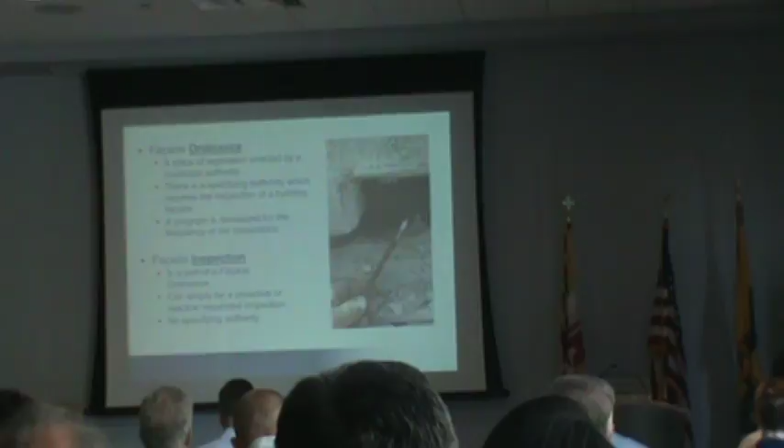The first presentation is going to be about facade inspections. What's important is that before you talk about facade inspections, we hear other terms floating around, especially up in the Northeast. Facade inspection is one thing, facade ordinance is another thing. They're partial, one is part of the other, but we're going to talk specifically about facade inspections because there's something missing in most of the cities here in Maryland, Virginia, and DC.

Facade ordinance is a piece of legislation, that's the best way to look at it. It's enacted by a municipal authority. There's a specifying authority that really dictates what needs to be done. So the ordinance is a piece of legislation, there's a specifying authority, and there's some program that tells you what they want, from the frequency of inspection.

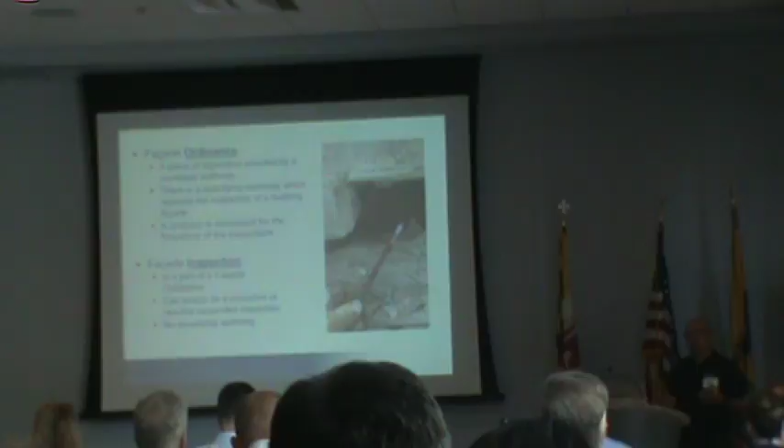Every 5 years, every 2 years, all kinds of different things. We're going to talk a little bit about ordinances just so you're exposed to them, but know that it doesn't matter if you're from down here because there are no ordinances anywhere around here. But it's important to understand how we get to the context of what a facade inspection should be. A part of an ordinance is a facade inspection, but a standalone facade inspection is simply a way to be proactive or reactive to a requested inspection on a building.

Sir, I was wondering if we could turn down the amount of light, it's a little hard to see. Yeah, I think there's actually a switch right back here. You see them over there? You press the one, they both go down.

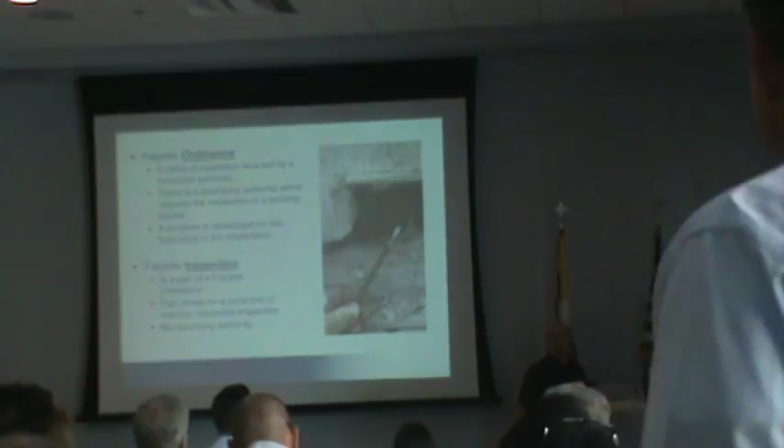Thank you. No problem. And what's most important about facade inspections, there's no specifying authority. Welcome to the Wild Wild West, right? You need a facade inspection, you better figure out a scope, because there is no way to really tell you what to do if there's not an ordinance and a specifying authority.

Facade ordinance background. So why are we even mentioning facade ordinances? Well, things fall off buildings, we all know that, that's a pretty common topic. There's a gentleman I heard of through ASTM, my friends at ASTM, I'm unfortunate I didn't get a chance to know him well. Clayford Grimm had mentioned that masonry falls off a building facade somewhere in the United States about every 3 weeks.

That's a real opinion of his, but I'm going to tell you it's more than a real opinion, because just this week we've had 2, one in Pennsylvania and one yesterday in Baltimore that nobody knows about. So that's the key to it, these fall off all the time and nobody knows about it. Kind of either the property manager kicks it underneath the desk, or something happens, right? Nobody really looks into it too much.

Mandatory facade ordinances have been created in several cities in response to these occurrences that have happened. Back in the 70s, we're not going to get into the whole history of facade ordinances, but that's when things started falling off buildings and ordinances started to be a part of certain cities.

The tragedy is what's most common about all the ordinances that people put into effect is because people died. Pedestrians died, property got destroyed. It's not uncommon to hear the story of how lucky it was, that stone fell over there, boy we're lucky. There's a lot of luck, but there is a lot of death, and that's kind of the challenge. I don't know of one ordinance that has actually been enacted proactively that isn't based in death.

So that's kind of shitty, right? Think about that - we basically wait until somebody dies to do things. There's 12 of them in the country, 12 cities. This big giant country, we have 12 ordinances, that's all. And the ordinances are proactive inspections on some sort of frequency to identify life safety issues on buildings. That's what the ordinance is all about.

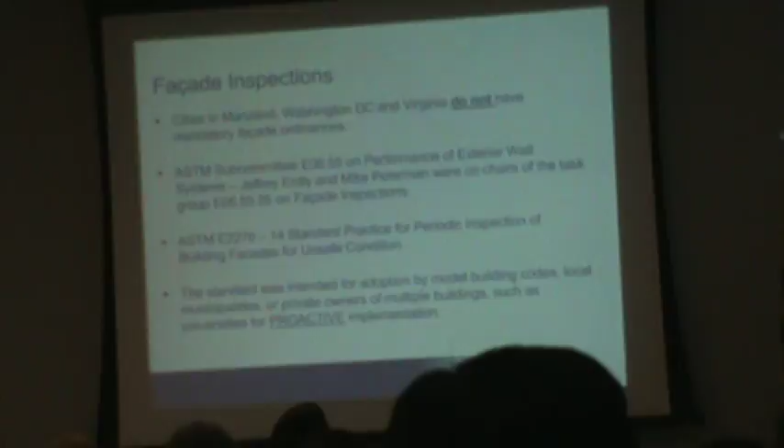So in being proactive, what does that mean? What do we use if we don't necessarily have guidance of an ordinance or an authority telling us what to do? I'll give you a brief background - I was part of ASTM for years. I'm still a member, I don't go as much as I used to. But I was part of E06.55 with Jeffrey Erdly and Mike Petermann, two really good guys, co-chaired a task group who specifically put together a standard from ASTM for facade inspections.

So the standard that they created was E2270, the standard practice for periodic inspection of building facades for unsafe condition. It's pretty much the Bible, but it's only 6 pages long. It's enough to give you some context of what you should do if you don't have a specifying authority - you don't have anybody to tell you what to do. This is a great document to use.

They designed the document, and when we voted on the document, the hope was that by 2017 we'd have more than 12 cities with a facade ordinance. It didn't work, right? They went to the International Code Council, tried to talk to them about it. They went through the whole story - the lady who got cut, the piece of glass falling out, told all the horror stories. They were not interested in implementing it in the national codes, so now you have to let the municipalities try and fight it out or figure out if they want to have one or not.

And in DC, Virginia, and Maryland, they're not interested. We've approached the city of Baltimore even, and I think there's some interest there, but it's not an easy conversation to have. If you're a property owner with multiple properties, it's not like these things happen for free with a drone - it doesn't, right? So unfortunately, it's a lot of hands-on stuff.

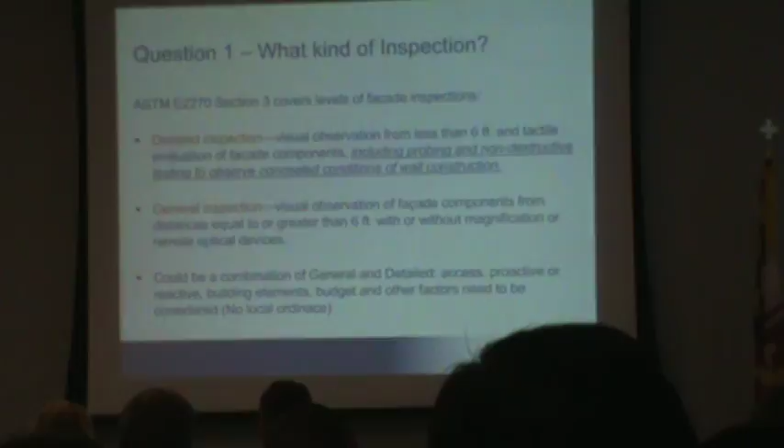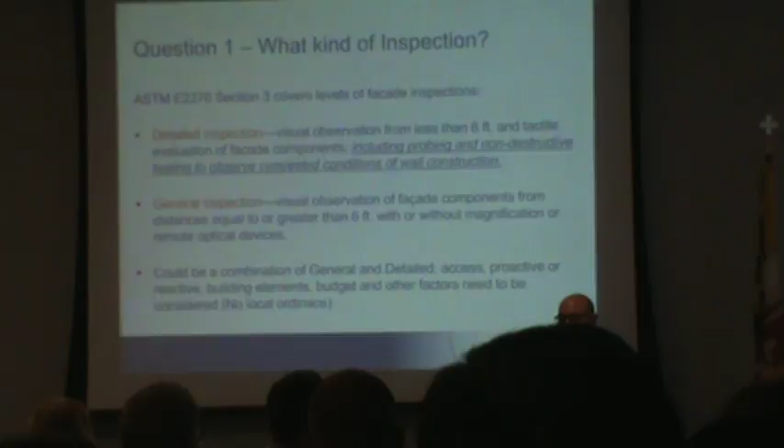The easiest way to talk about a detailed inspection is: I'm getting on the building, I'm touching everything, I'm doing probes, I'm pulling on anchor panels. I'm really getting my hands on this building. A general inspection is greater than 6 feet away. This is binoculars, maybe being on a swing stage and looking over at the wall but not touching it, not touching every element of the building. That's the easiest way to think about a general inspection.

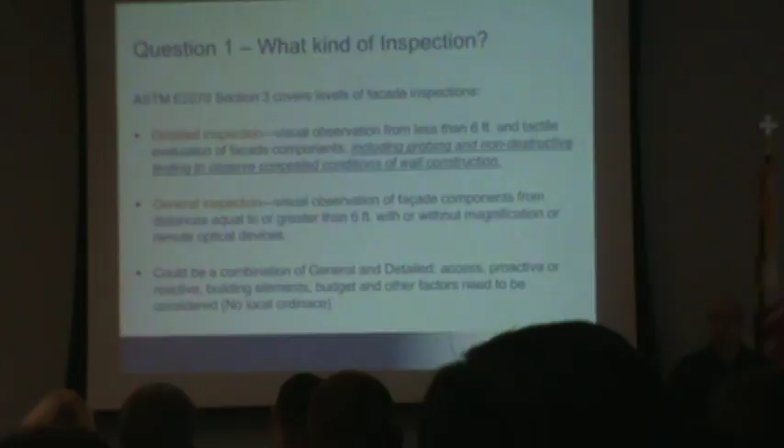A general inspection is very good for a proactive owner who says nothing's fallen off, can you give me a price for a general inspection of the building so I can maybe prevent having to be reactive and be proactive instead. You can also do a combination. If you know a building has some issues by looking at it with binoculars, maybe on certain drops you do a detailed one, and on certain drops you do a general one. There's a combination of all these things, but most important is understanding the context: is it further away, or closer than 6 feet.

Does this address drones at all? No, I'm not talking about drones whatsoever. Potentially a general inspection could be done by drone if you'd like to do something like that.

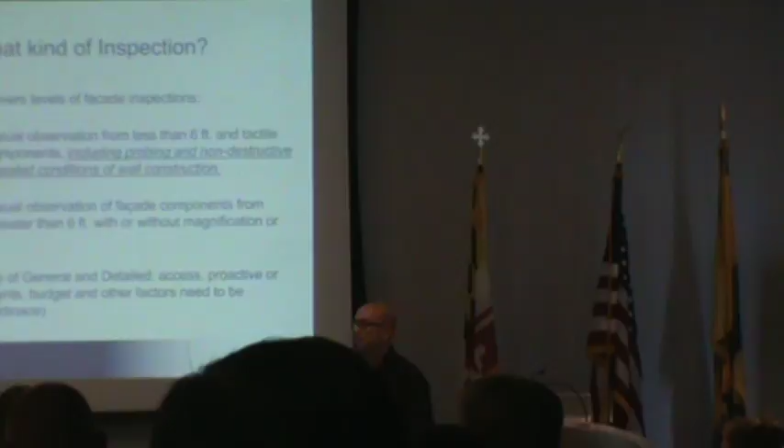How often do you do the actual inspections? We're going to talk about that too, because where we are, there's no ordinances, so there's no rules. This is basically up to the building owner, manager, engineer, or whatever it may be. There's no ordinance to enact any of these. So you can have a building owner who hasn't touched the building in 50 years, and all of a sudden say I want a detailed inspection, or maybe a general inspection. But the first question to ask is, what kind of inspection?

There are benefits to a detailed inspection, right? So even if you go general, there are benefits to it. This is a building where we were able to inspect the finial all the way at the top, above the dormer, that from the ground looked great. We get up to it, and it doesn't look too bad.

Where's Jimmy? Jimmy's back there. Jimmy weighs like 110 pounds, skinny as can be. He's on a 145-foot high reach, and he takes this thing and goes to move it, and it moves. He's just touching it, tactile, touching everything. When Jimmy touches this thing and it moves, that's curious. He puts a lot of effort into it and pulls the thing off. What you're seeing there is a drill bit. I guess at some point this thing broke, and the fix was to take a drill bit, jam it in the old anchor hole, put the stone back over top, and call it good. Interesting, we would have never found this without a detailed inspection, hands on the building.

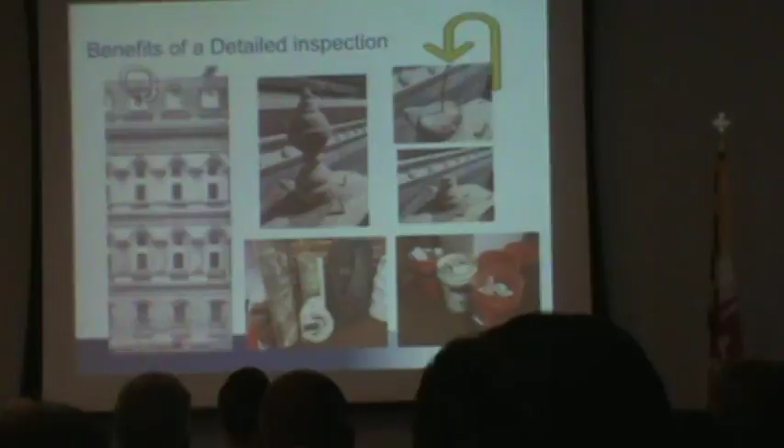While we're up there, here's all the other things we pull off the building, right? 5 buckets of stone. This is stuff that we touched and went, oh, it's loose, and took with us. So it's important to know that you do get a lot out of a detailed inspection.

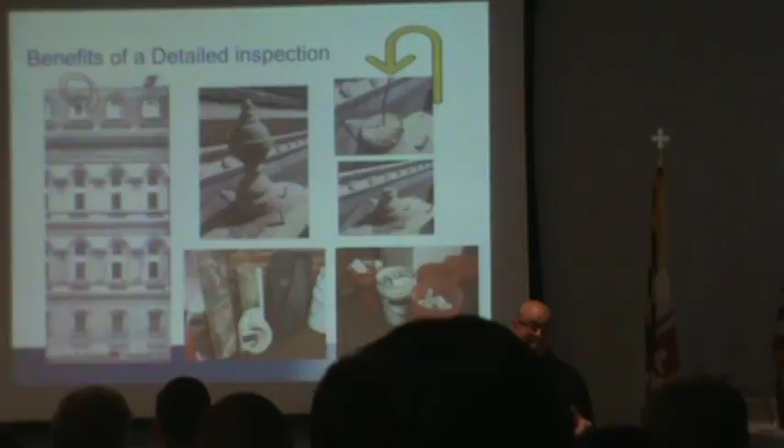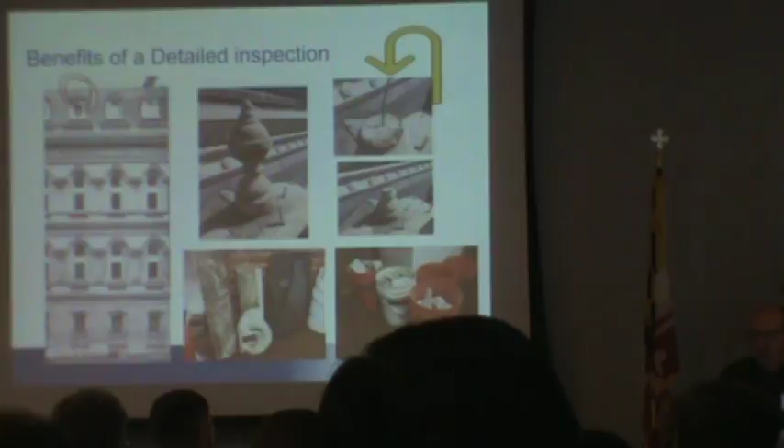If you call an architect or an engineer, I would tell you there's a strong chance that if something fell off your building, they're not going to tell you to do a general inspection. They're going to tell you to do detail, because something's already fallen off. Even if you're going to do a proactive inspection, there may be important places to do a detailed inspection and really get your hands on some complex areas. I'll tell you, and we're going to get into this more, if you have a terracotta cornice, always do a detailed inspection if it hasn't been looked at for a long time. Sometimes you just need to do a detailed inspection.

That actually work for this. So rope descent systems, industrial rope access, suspended solo baskets, and suspended swing stages are the big ones we usually see being used to get on site and do a facade inspection.

Question 3, before you get too deep into selecting a form of access: is there any possible stabilization required? Usually this comes from the binocular survey. We know we need to do the facade and a general detail inspection, but we need to look up and see, by binoculars, if there are locations that need netting, strapping or pinning, or if something is already there. Because once we figure that out, we might need to go back to question 2 and reconsider what access we're going to use.

So you might think rope descent systems are great for your general inspection, then realize that cornice doesn't look right. Do you want to spend the money to get there with rope access, or just put a swing stage up in that location? Timing is important, and it's also important to reconsider at question 3 whether you've chosen the right form of access.

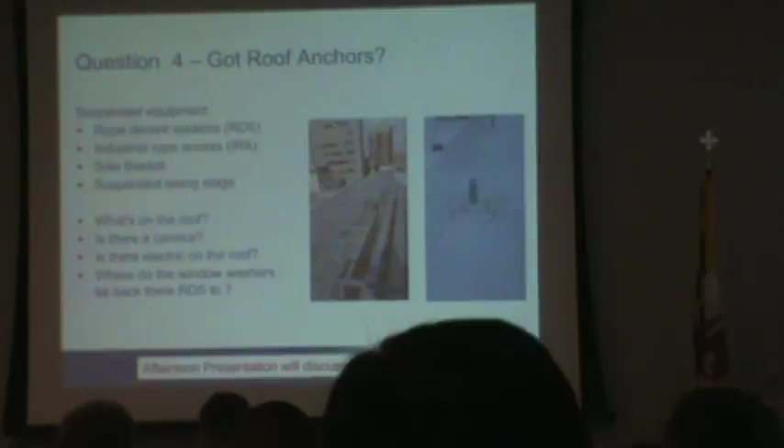Question 4: do you have roof anchors? All the things I just talked about, with ropes and suspended equipment, need an anchor to tie back to no matter what. This afternoon's presentation will go specifically into rope descent systems and anchors, since now it's a law. In addition, we have issues tying back solo baskets and suspended swing stages, so you really need to understand what's on the roof.

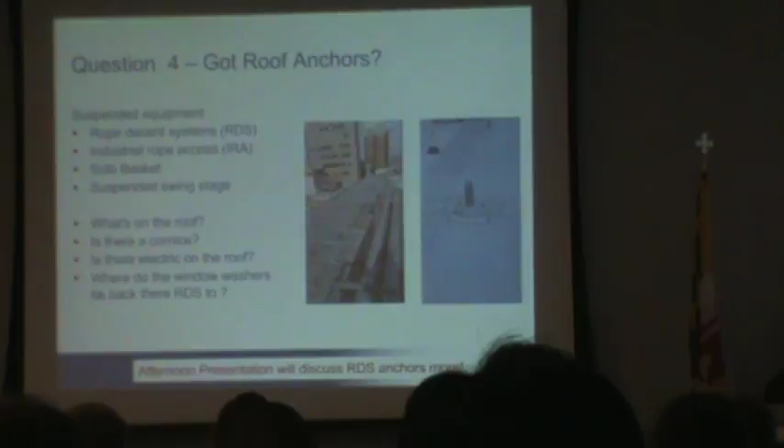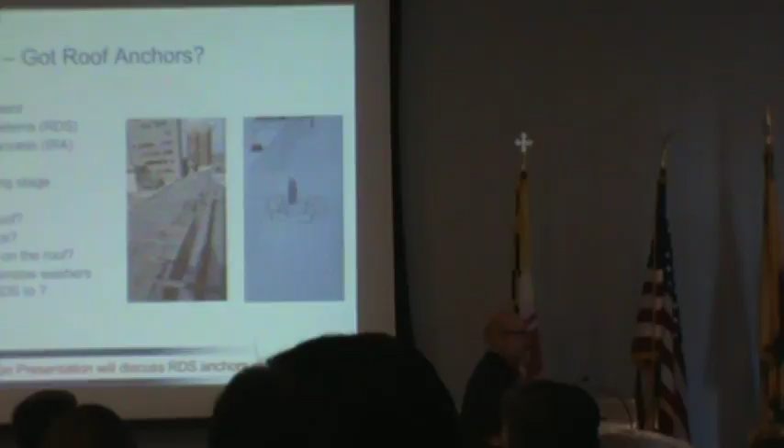If you have a deep cornice, is there electric on the roof? And you always have to ask where the window washers tie off to, not that you want to tie off there, because you never know with window washers. Where does the RDS system get attached? That might help you understand it, but you have to have that conversation about roof anchors, because if there's no way to tie back, it's more challenging, and you may need an engineer involved to figure out how to tie off all the equipment used for the inspection work.

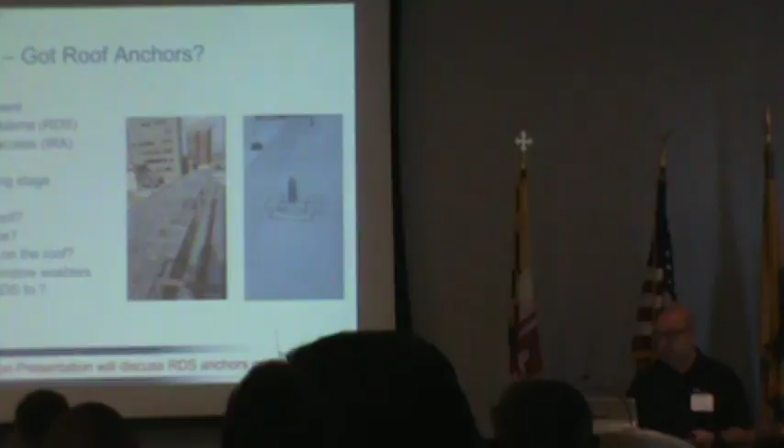So let's hit different types of access real quick. RDS is rope descent systems, like a Bosun's chair, window washer style. That's what I do, that's me on the right, I'm used to that stuff, capable of doing it, and I've done it most of my career. The one on the left is what someone from Kelly's company actually uses.

That's called industrial rope access, similar but a little more flexible, you can go side to side. Think of rock climbing versus window washing, that's the easiest way to think about the difference between those two systems. They both work, they both can get you somewhere. This is the least costly way to get on a facade and get your eyes on it.

Now, what you don't want is to be on an RDS system, pull on a piece of stone, and have it come off in your hand. Not a good time. So IRA actually gives you a bit more flexibility to take smaller things down, but with RDS, if you're taking chunks down, they better fit in a bucket and be something you're capable of holding onto. You should always check local restrictions, and this has everything to do with how tall the building is; once you get above 200 or 300 feet, these may not be the best form of access to begin with.

You can also use a solo basket, which is just a one-man basket. A beam goes out, plates go in the back, and you go over in the solo basket. Think about the building in drops, that's how all of us think about things, everything's in drops.

Don't think about floors when we're talking about anything we're going to talk about today, except for the roof. Everything else is in vertical drops. And when you hear me say drop, that means whatever the drop might be, a basket, an RDS system, a swing stage, a mast climber. These are all drops on your building.

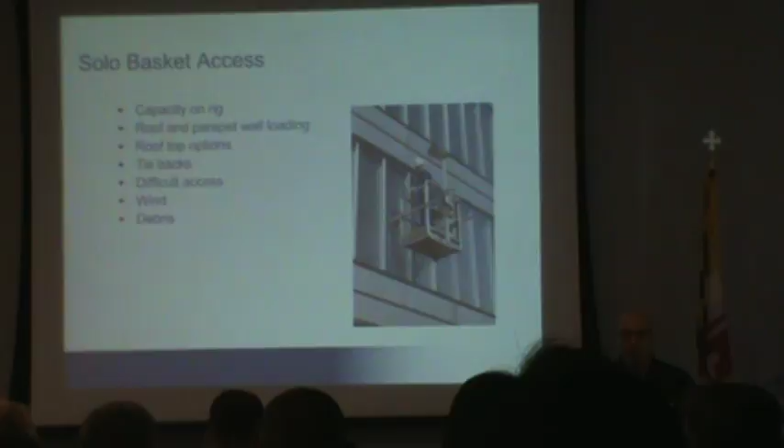So when I go up to your roof and I check out your roof, you'll hear me say something like, oh, you have like 8 40-foot drops. That means there's 8 swing stages of drops that go around your building.

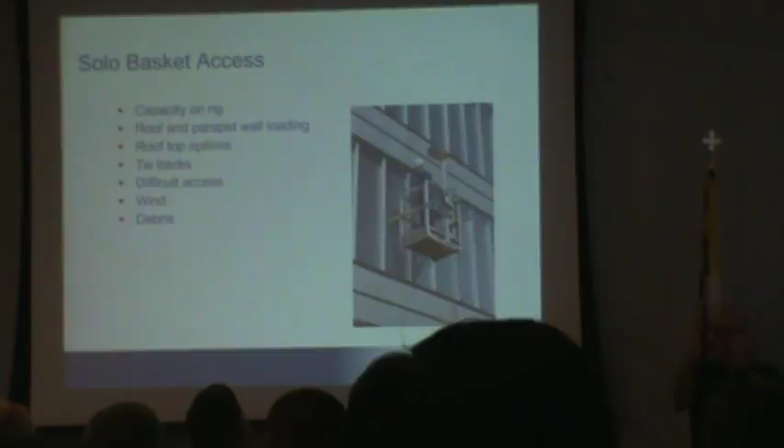So solo baskets get you one area of a drop, but not a lot. It doesn't get you a big swipe, right? So solo baskets are not bad, they're a good way to get in one place. Maybe if you're doing a general area and then a detailed area you want to get into, you can use the solo basket to specifically get somewhere you need to get to.

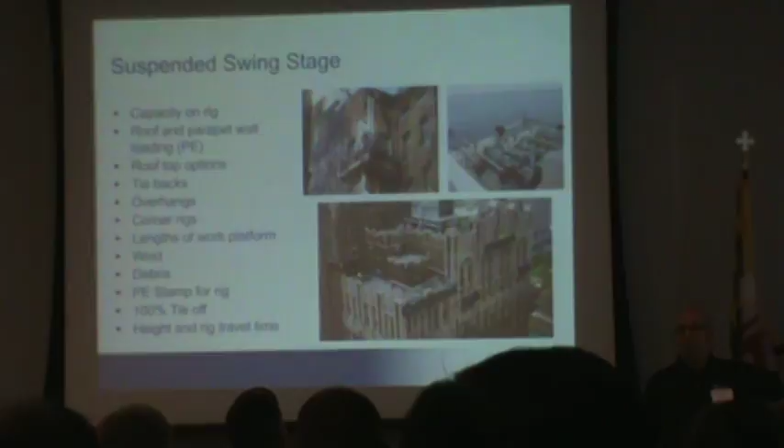The most common way, honestly, I see, and what I've been involved in, is the suspended swing stages. These are 2-point suspended swing stages. They use beams and weights on the roof, and they hang off the wires and go outside the building. Remember, roof anchors, where are we tying these things back no matter what? That's an important part of the discussion no matter what we're talking about now.

This is 10 Lake Street. It's one of my favorite projects I've ever done. You can see there we have baskets, we have swing stages, we have mast climbers, we have just about everything you can imagine. We're going to talk a little bit more about these buildings.

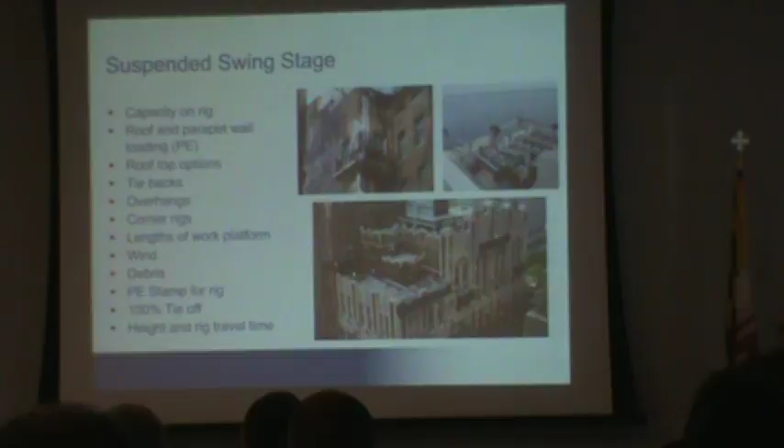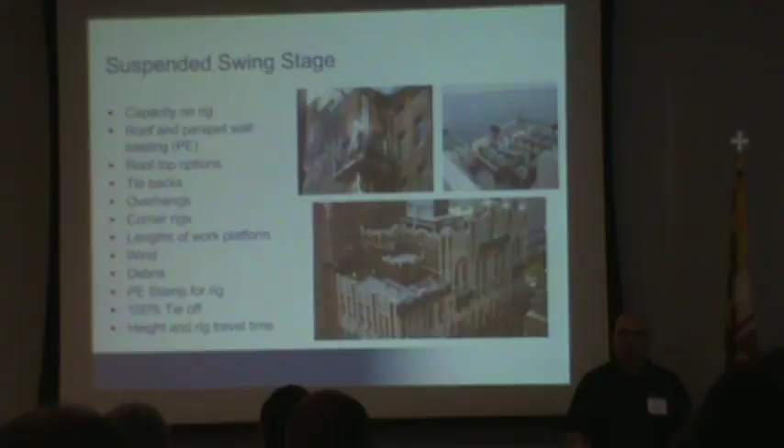This is a terracotta steel frame building. Awesome, beautiful, gorgeous, pain in the ass to rig, right? Just because they're all set back. There's all kinds of roofs. It takes you a lot of effort to figure out where am I getting on this building, how am I going to get to it.

And then last but not least, this is an earthquake response from years ago. What was that, how long was the earthquake now? 8 years ago? More than that. So this one was where we used an aerial lift platform and a crane to start to take down pieces of the bell tower that had fallen down.

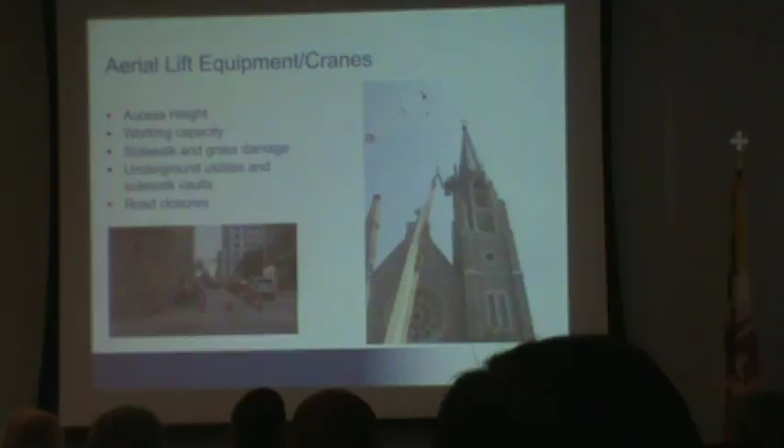I will tell you, as soon as you get to aerial lift equipment and cranes, street closures. You know, we worked for the city with the Department of Transportation, and I wish I could do that all the time, because they were very good, we just walked across the street, talked to them, and they told us what to do. It's nice when you work for the city, but if you don't, this is gonna definitely be a challenge, shutting down roads, taking lanes, it's not pretty.

So even if you have the opportunity to use aerial lift equipment and cranes, understand all these other moving parts you're gonna have to deal with, and it's road closures. Big one to deal with.

You could also get a permanently installed platform. Remember I talked about the monorail on the Pittsburgh project? That was a permanent system, a monorail system that was supported on the underside of the corners. You could also have them attached to the top of them. The one on the far right is from North Carolina. This is a tall building where this piece actually has the beam in it, and then they have a bicycle chain and pedals. And you go like this, and the chain pushes the beam out, and that's what you hang off of.

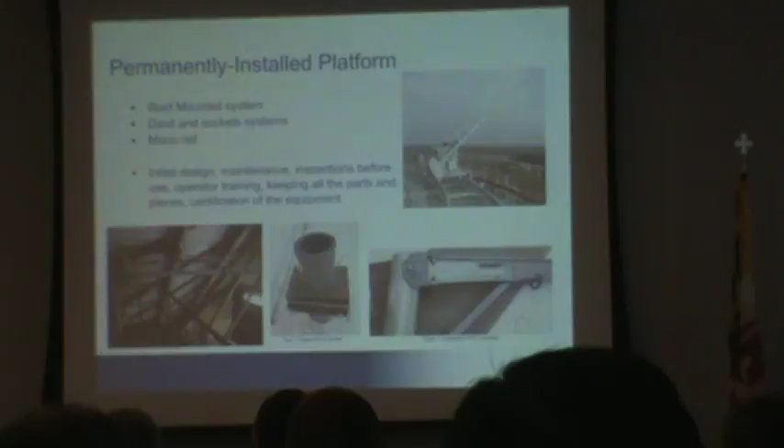Weird. I mean, you'll see, these are davit systems, every system is different. Get the drawings. A big part of this is it was initially designed. Find out if it's been maintained, inspect before you use it.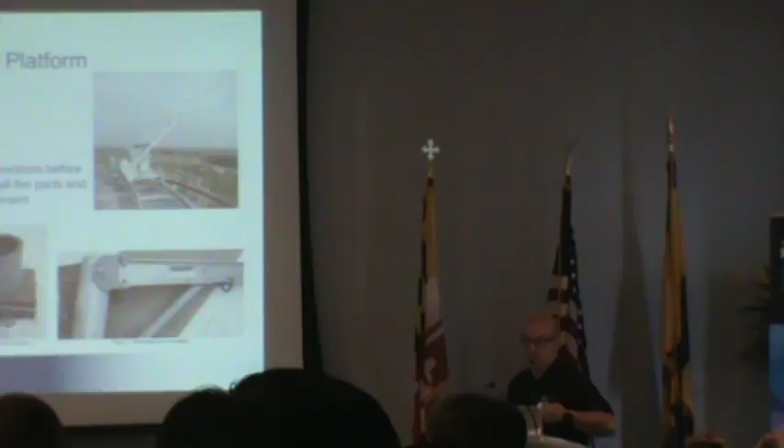You need to have operator training, keep all the parts and pieces, that's one of the biggest challenges. I can't tell you how many times I'm walking on a roof and there's no sockets for the davits, or the davits are bent, or something like that. You really do have to have a sense of keeping this stuff all together.

Permanently installed platforms are traditionally an initial installation, and you will see them around our tri-state area. They are around, but once you get into Philadelphia and really New York City, you'll see a lot of permanent systems. That's where you see most of them. But I think you're seeing a lot of them in Northern Virginia as well. Once this whole roof anchor thing comes to fruition, I think you're going to see more and more permanent systems, because people know that you're going to have to do something to the roof.

You're going to have to maintain it. And if you're an architect, this is going to be part of what you'll have to do going forward: what roof anchor system am I using, or what permanent system am I going to put in to get onto the facade to maintain it.

Mast climbers are a good one. That's the picture from the bottom of 10 Light Street. That's mini mast climbers. The difference between the two is just pure size and weight capacity, but sometimes a mini mast will work as well. Remember, we're talking about inspections, but you can't not talk about what you're going to do to fix the building at some point.

So that's why it's important to know all these things from a form of access beyond just traditional inspection work. Supported scaffolding is another way. Costly, but you can put a ton of people up here, do a ton of work, and get off the building pretty quick compared to a swing stage where you only have 40 feet and 2 guys. This really does work a lot, but there's a lot of complexities to make sure you get the right scaffold system.

I've already seen people put complete scaffold systems up on buildings, put them too close to the wall, and then the stucco guys can't actually stucco because the scaffolding is too close to the wall. You got to understand the work, and think through the process if you're going to use supported scaffolding. And then you can think outside the box.

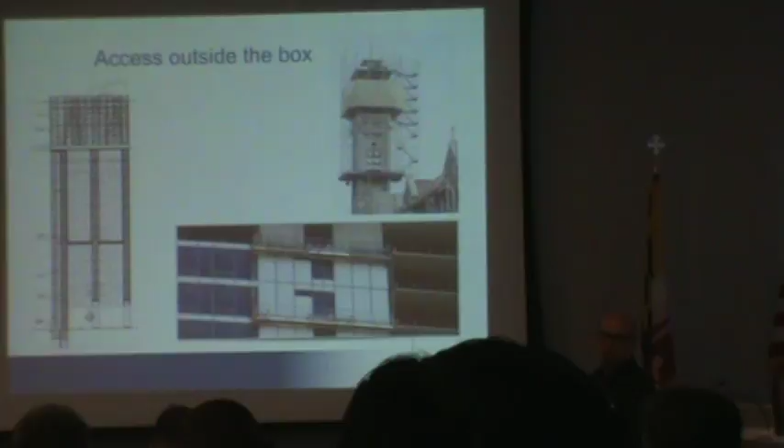This is the W Hotel in New York City. Initially, when they had a scope of work, we worked with a company who designed these giant masts that came up, supported the scaffolding on the mansard roof, and then in between we hung swing stages to get to the facade, which is pretty cool.

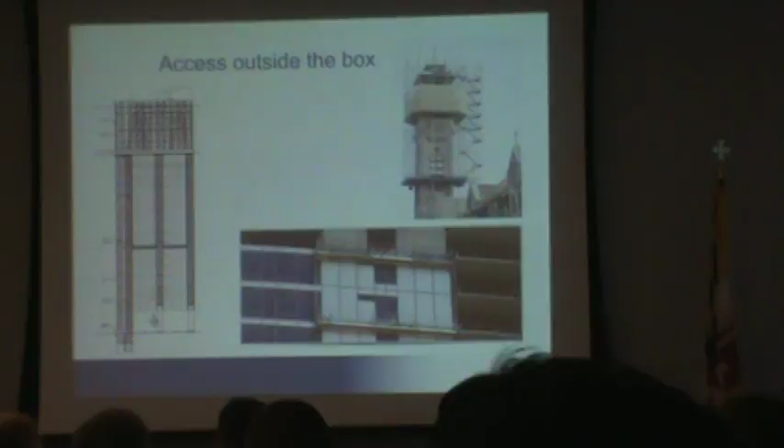Or this happens a lot in bell towers. You don't have the scaffold all the way up to the ground, you put beams to the belfry and scaffold. These are all ways to kind of get there to do the work. Again, yes, this is beyond facade inspections, but you have to get the context of what's going to come next, and that's what we're trying to make you aware of.

Again, hoist. And the last question: what's below? This is all fine and dandy, but we got to figure out what's below, which means you really got to look into overhead protection. Again, tri-state area, guess what ordinance you have for overhead protection? Exactly that, nothing. There is nothing.

So I get nervous as an engineer if I've got some hokey contractor putting a swing stage up with old caution tape and cones on the sidewalk, because that's not sidewalk protection. You know, I need a canopy, right? So you got to really understand who you're working with to make sure you're going to get yourself in a good situation and not put the owner at risk.

All these 5 questions will cost more than you will ever spend on me or you or any other architect and engineer in the room. The money is what we just talked about, those 5 things. Nobody cares about our services usually because they're going to have sticker shock when they find out it's $100,000 just to get on the wall, right? Things like that are a big deal. So keep these 5 questions in mind. Those are going to be the money questions.

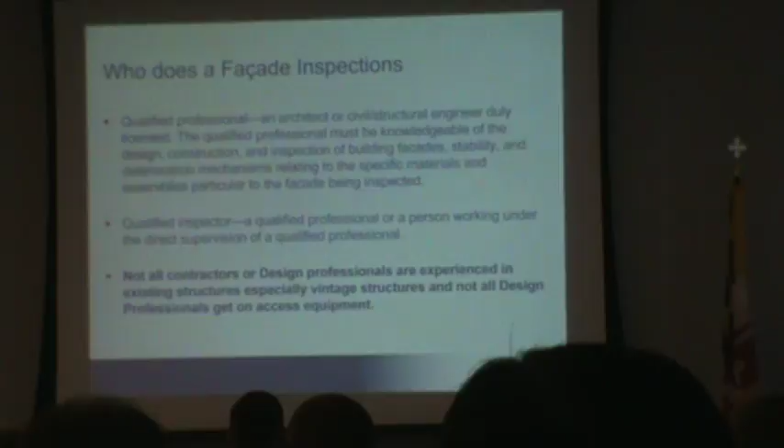So now we're going to go through, as quickly as we can, who does facade inspections. Usually a qualified professional architect or engineer. A qualified inspector would be the guy on the building. But remember, not all contractors or design professionals are made equal.

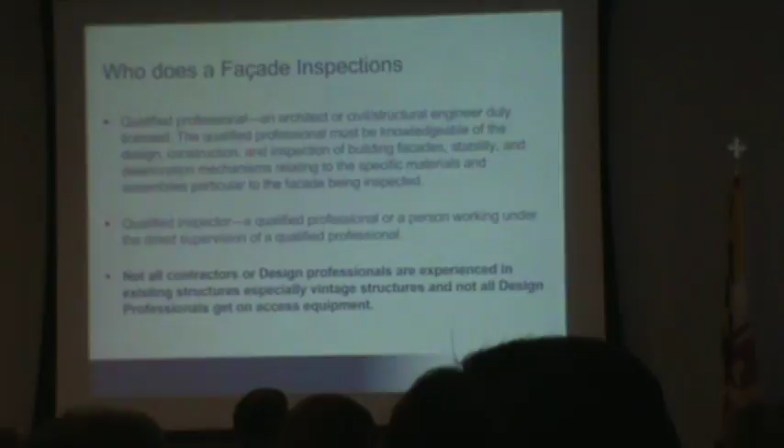I love my new construction architects and engineers. They're friends of mine, I'm friends with them. But they are not restoration and preservation engineers or architects. We are a weird sub-chapter, redheaded stepchild of the industry. So make sure you're actually getting somebody who's familiar with transitional steel frame buildings, 1105 testing, and AAMA nozzles.

If they're not talking like that, you've probably got a new construction architect or engineer, which is fine. They're just going to have a giant learning curve when they deal with removing and reinstalling precast panels or something crazy like that. So just be aware there's a group of people that only do these odd things, whether it's a new building with something falling off or a building from 100 years ago. ASTM defines a facade as the exterior of the building, except for horizontal roof areas, and they talk about this thing called appurtenances.

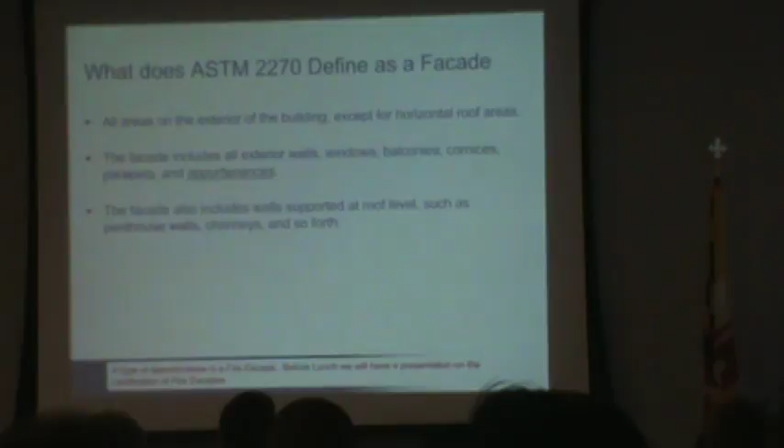My buddy Cisco is going to be talking about a very important appurtenance, which is a fire escape to get off the building. He's going to talk about that later, but it also includes penthouse walls, chimneys, and so forth. So that's what they consider as a facade. But remember, we have no ordinance, so this is up to us for interpretation. Every time somebody asks me for a facade inspection, very rarely am I not going to look at the roof, because it's connected. It's very difficult to not pay attention to the roof when it has holes in it.

So imagine you have 40 buildings on your campus. You can take this information and categorize each building and have some context on how to proceed with a proactive maintenance program. I have it in mind now—probably 15 years ago, I did this with Penn State University. We sat down at the beginning to talk about facade inspections. That was the beginning of them categorizing each of their buildings to do something proactively. Because again, State College, no ordinance. They're just going to do something proactive to make sure they're keeping themselves out of risk.

Some of the steps you need to take advantage of, or pay particular close attention to, is reviewing the project documents. City Hall was awesome—they had everything. It was like the motherlode. They had the original history of construction and dedication book. Ask anybody here who's an architect or engineer—we also get the pile of crumpled up drawings in the corner with water stains.

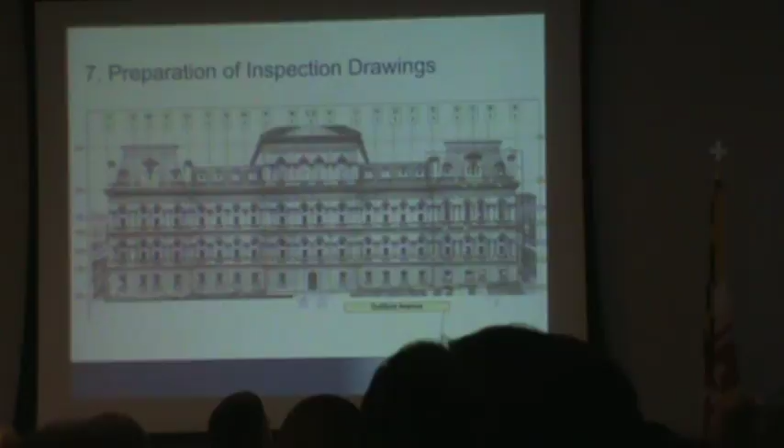Once you do that, upper right-hand side, you'll see one of the grids that falls into that. That allows us to take a sheet of paper and record some information for that specific grid—could be the terminology, unit of measuring quantities, photo management technology. This kicks off gathering all your data and allows you to know where all these specific things are going from.

Kelly's not here, but she's got a pretty cool app called TPAS too, a computer system where they don't use paper. Basically, everything comes up on the tablet and rock and roll, which is good. It's a good investment if you have the capability and a client willing to pay for it. They're fast, they do a good job, so you can have higher technology as well. It doesn't matter what technology—you need elevations, you need to grid them, you need to gather the data consistently, and you have to make sure everybody can share it properly.

When you're organizing the data, other than what kind of inspection, this is another thing to talk to people about. Again, no ordinance, no specifying authority, so you have to have a conversation about what data they want. The biggest thing we do is use ASTM E2270 to have the conversation about how to classify things.

The first one is ordinary maintenance. You can read that—it's not an unsafe condition requiring repair stabilization. It says ordinary maintenance: point this, caulk this, paint that. You see them on all the buildings.

Requires repair stabilization is a condition at the time of inspection that shall be required to stabilize in order to prevent progression into an unsafe condition. So requires repair stabilization is when you do banding, pinning, netting—you're putting something up to make sure something doesn't fall off. You're gathering enough information to go to the ground and have a conversation on how to fix that.

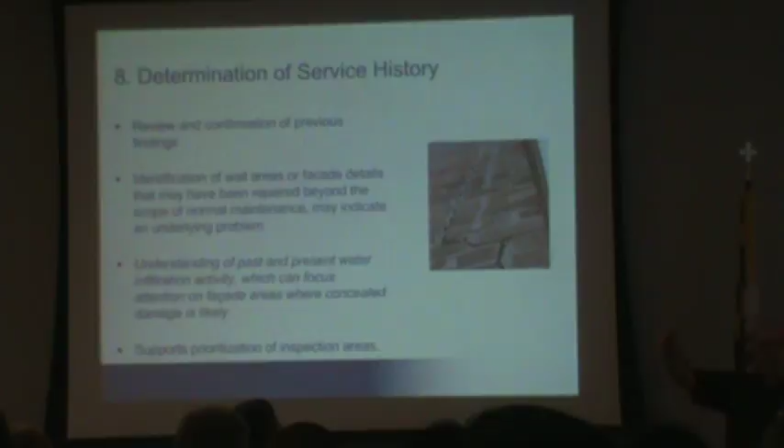That's another statement to keep in mind. We have a lot of clients that, because there's no ordinance, aren't necessarily interested in the preservation and restoration program. They just don't want anything else to fall off anytime soon. So you really have to have that conversation with yourself, your client, your leadership, your management, or the design professional - what's your expectation of that? Is it just to be done so we don't have to worry about anything falling off, or are we actually getting enough information to put a plan together?

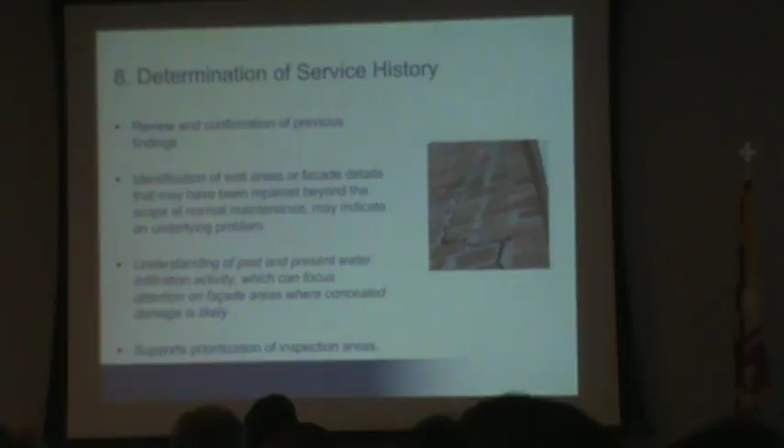Well, go back to the last slide when you say an unsafe condition - truly any design professional, licensed professional, has to report that to the owner and possibly the building regulatory authority. Yeah, and if there's an unsafe condition, again, that's a conversation you have to have.

Without an ordinance, there's no instruction. So no matter what, if you have an unsafe condition, you absolutely have to bring it up to your client. If you have overhead protection, swing stages up, and those kinds of things moving, usually that's good enough to get to the next step. But if you're up there with binoculars, or on the ground doing a general inspection, and you find an unsafe condition, everything gets shut down and you go to your owner to let them know. In a detailed inspection, since you're already there, you can do something to make that unsafe condition safe.

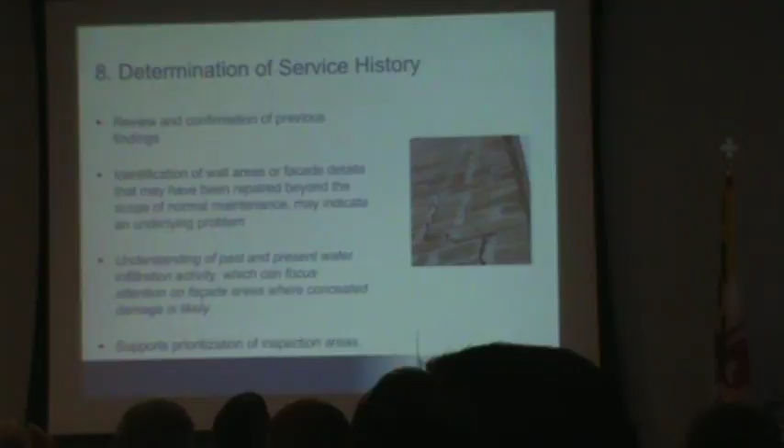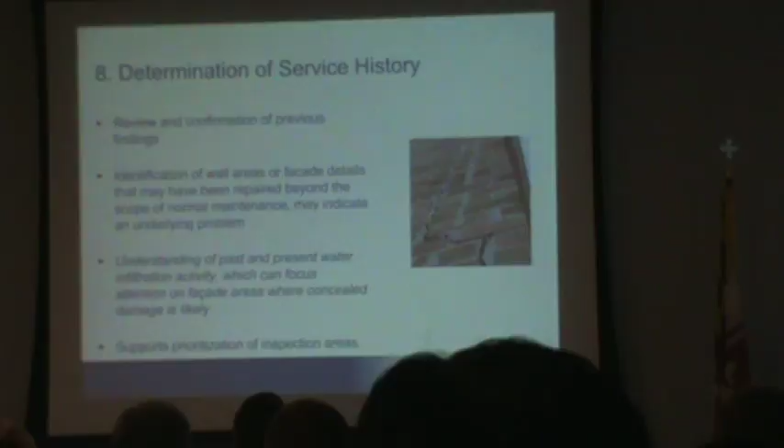Service history - understanding the past and present water infiltration activity - is an important part. If you don't have an ordinance or a governing authority telling you what to do, most clients don't want to talk to you about interior leaks. They want you to get out on the outside of the building and make sure nothing else falls on somebody's head. So without that ordinance, we have to push sometimes to make sure people know that part of this is supposed to include leaks, because leaks can help pinpoint where we need to focus our inspection and investigation work.

Real quick, because I've got to get through this program - steel frame buildings are my favorite buildings in the entire world. I love them better than anything older or newer. I think they're fun, interesting, and exciting. But they're exciting for me and not for building owners usually, because they're complex.

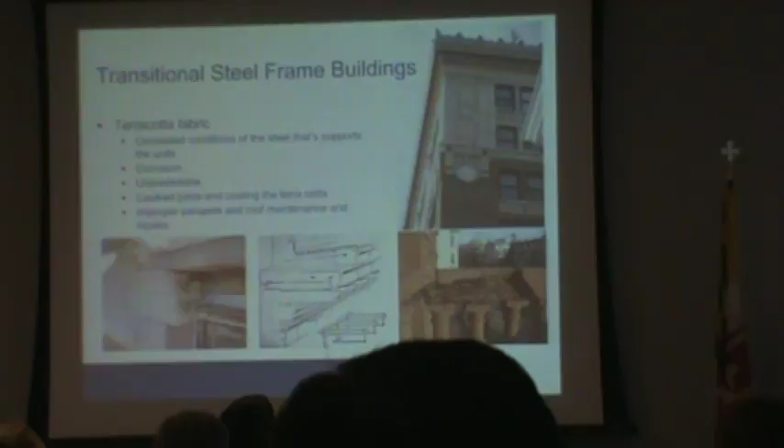The worst thing I've seen over the years is improperly maintained terracotta. Maintenance people do more damage to terracotta than I've ever seen terracotta do to itself. Once you start caulking mortar joints, coating over the terracotta, or running membrane up the back of parapet walls that have terracotta, you can destroy terracotta in 5 years by doing the wrong thing - and that could be terracotta that's 100 years old. So just be aware, if you have terracotta in your facade, it's quirky and beautiful, but there are some real systemic things you've got to look for.

If you see cracking and you fix the crack, you're not fixing the problem. Most terracotta issues are steel corrosion, which you can't see - all you see is the crack. So it's a challenge to discuss, but believe me, this center picture shows you how this stuff's put together. It's hung on steel.

Steel corrodes, steel gets wet, steel corrodes. Which brings me to this point, chicken and egg, right? Does it crack and leak? Does it leak and crack? It doesn't really matter, because if one happens, the other one's going to happen.

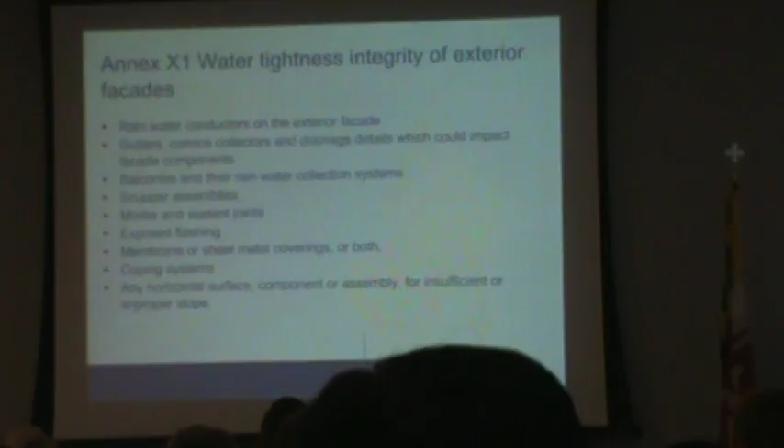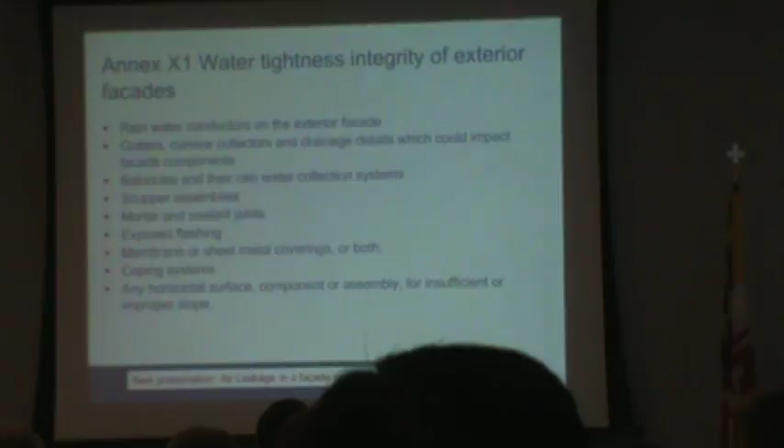Not sure which one came first, but an interior leak survey will help you understand at least the result, and then you can get out there and really start to look for it. There's a whole section, and we have Can-Am here that's going to talk about air leakage. Again, if it's leaking air, it's leaking water. If it's leaking water, it's corroding, doing all kinds of nasty things, mold, mildew, all kinds of things. So even though we're on for a facade inspection, you have to take the time to understand what kind of water infiltration occurrences may be happening.

Difficult conversations, again, I'm going to reinforce this one. We just heard this two weeks ago: I'm not looking to put a preservation plan together, I just don't want anything to fall off for the next 5 years. This is a hotel company who buys hotels and sells hotels. What they don't want is to kill anybody, and whatever we fix, they don't want to see the netting and the strapping and the pinning. All they know is when they're done, they'll sell this thing. Just make sure it looks okay and nobody's going to be hurt, and move on.

That's cool, but you have to have that conversation beforehand, and it might not be pretty, because they might feel like you're attacking them, like they don't care about the building. They might care about the building, but for them it's an investment. They don't care about the terracotta and the preservation of it, right? They just want to make sure it's a marquee building and they can do the best they can with it.

I'm telling you, it's not an easy conversation, because usually around here it's reactive, not proactive. It's not like they have a budget for it, right? If we actually had the chance to have these conversations early on and set a budget, I'm sure people would have us do this. But because most of the stuff is reactive, it's bad enough they have to go ask for money, let alone ask for money for a preservation program.

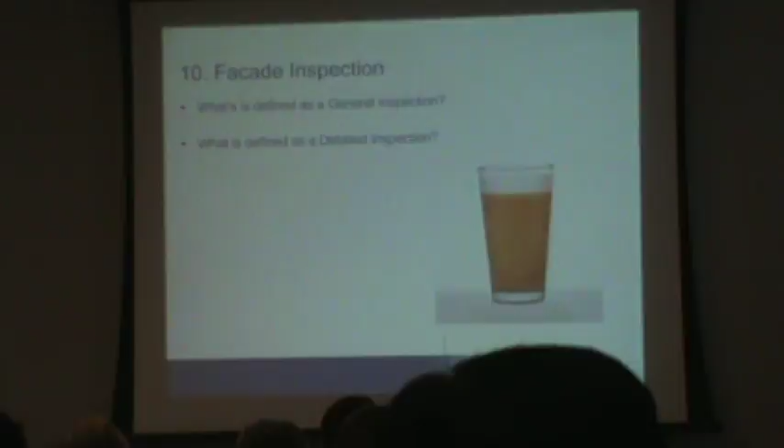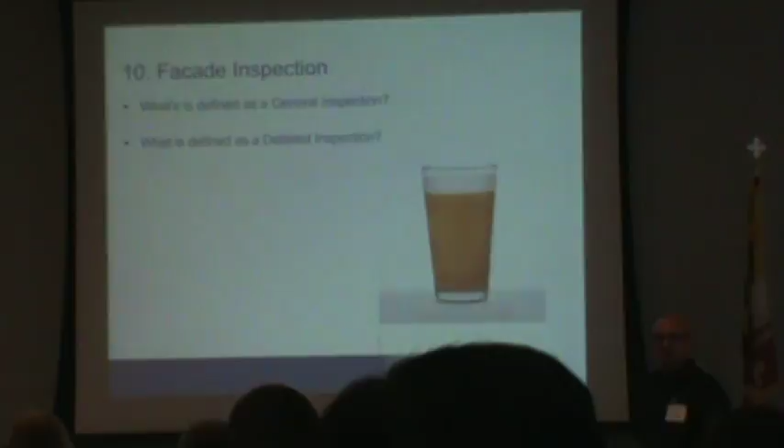I got one of these. What is defined as a general inspection? Anybody remember? How about anybody else? Anybody else got an answer for what's a detailed inspection? Touching everything, right? All right, I'm glad people pay attention. That's important.

I'm not even going to get into these, this is all the stuff we just talked about. What haven't we talked about? What the hell do I do when I get on the swing stage? I haven't even got there yet, right? These are all the crazy things we need to do when we get up there: pull, push, look, sight line, and field. All kinds of things we need to do when we get up on that swing stage, high reach, Bosun's chair, whatever it may be, right? There's a litany of things we need to do.

And who had this? Rita? I will get you in there. So, that's important, what's below, right?